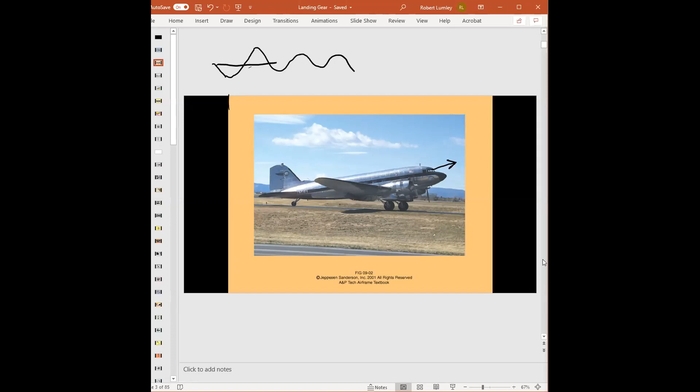The other problem with a tailwheel aircraft is mainly during landing, but it can be other times, and that is a tailwheel aircraft has the main wheels and then the tail wheel.

The center of gravity is somewhere in between, but it's aft of the main wheel, forward of the tail wheel. Now if we're going this way, the problem is that when you come into land, the brakes are on the main wheel.

The CG is where all the weight of the aircraft is trying to go forward. So here's the main wheel, here's the CG. When it's trying to go forward, if the aircraft gets a little bit out of whack, the CG is going to try to fishtail you or spin you out. This is known as a ground loop.

And that's because the wheels in front of the CG have more friction than the CG, so the CG tries to overcome that friction.

You may have done this before in a car. You know you have the e-brake, or emergency brake, parking brake. A lot of people's cars have a handle for that brake. Well, if you're making a turn and you pull up on the emergency brake, understand that only puts brakes on the rear wheels. The rear wheels, if they start to slide, lose traction, and the front wheels still have traction. If you're in a turn, you can lose control big time, meaning spin out.

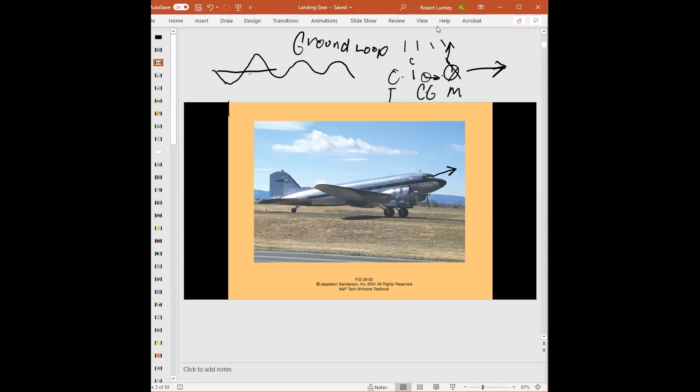Once the engines got stronger, we could use smaller propellers. Then we went to tricycle style landing gear, also known as a nose wheel aircraft. So now we have the mains back here, we have a nose wheel up here, and the CG is now forward of the main wheels, but aft of the nose wheel.

In this type of configuration, the pilot can see better going forward, so they don't have to taxi in that serpentine motion. And because the CG is in front of the main wheels, during landing, if we lock up or drag the brakes, meaning apply the brakes here, the CG still wants to go forward, so it keeps the aircraft going forward. Okay, good on that.

Come on, Kayla, where are you? Sorry, I was muted. Yes, we're good. Okay, at least do that and then I'll be happy. Get through a little quicker. All right, are we good with that?

Most aircraft are built with a nose wheel aircraft or tricycle gear, and it's also easier to make that aircraft nose wheel steerable than it is for the tail wheel. So that was landing gear arrangement: tail wheel type, tricycle type landing gear.

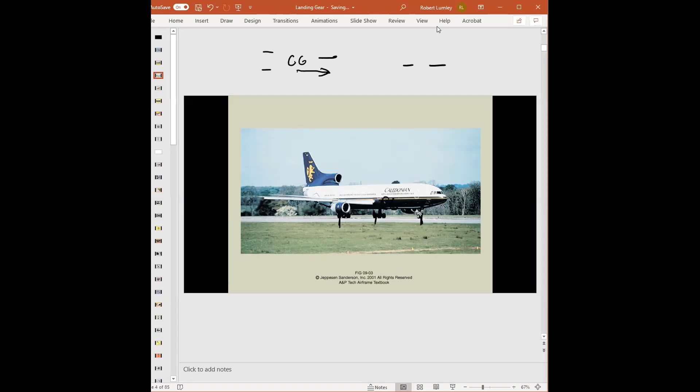They talk about tandem landing gear. Tandem landing gear just means that one wheel is in front of the other, kind of in a straight line. You could see that, for example, on the main gear, there's a wheel, one in front of the other, that you can consider tandem gear. Not a lot of aircraft have true tandem gear. If you know the Harrier aircraft, it has a nose wheel, it has a body gear, but out on the wings it has small little gear that hang down just so it doesn't tip over. Nothing tandem gear, just keep in mind one foot in front of the other, if you will.

So next they talk about fixed or retractable landing gear. That's the big question, and the answer is speed. Now this kind of goes back to the first picture and really is described well under landing gear types.

Here's the thing: a fixed gear aircraft generally will weigh less than a retractable geared aircraft, because a retractable geared aircraft has to have something that can retract the gear. This could be a hydraulic system, an electric motor, hydraulics and stuff, and all this adds weight to the aircraft. Whereas a fixed gear is relatively simple and thus weighs less. Well, here's the thing, and we kind of talked about it during the last class in assembly and rigging.

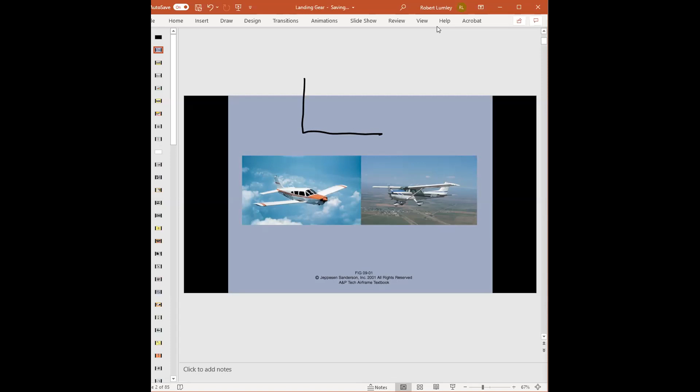We have two types of drag: parasitic drag and induced drag. Parasitic drag is anything sticking out of the aircraft that hits air, so the faster you go, the more parasitic drag we have. Induced drag, on the other hand, is created by lift, so the heavier the aircraft is, the more induced drag we have.

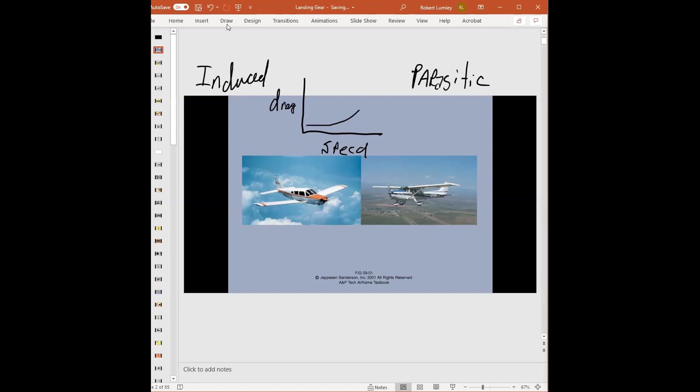The parasitic drag curve looks like this. Here's speed of the aircraft, and here's the drag. As we increase speed, parasitic drag goes way up. So this is parasitic drag.

Induced drag actually curves the opposite way. At very low speeds, we have to increase our angle of attack to produce the lift, and as we increase angle of attack to produce more lift, we produce more induced drag.

So, a slow moving aircraft versus a fast moving aircraft. If the aircraft goes slow, parasitic drag by having the landing gear out, meaning fixed, would be very low. And because the weight of the aircraft is lower, our induced drag would also be lower. Does that make sense?

Now, if we had the same aircraft that moved slow, but made it a retractable geared aircraft, the parasitic drag would decrease somewhat, but it's already low. The induced drag would actually increase because the aircraft is heavier, thus having to increase the amount of lift the airplane is producing with angle of attack.

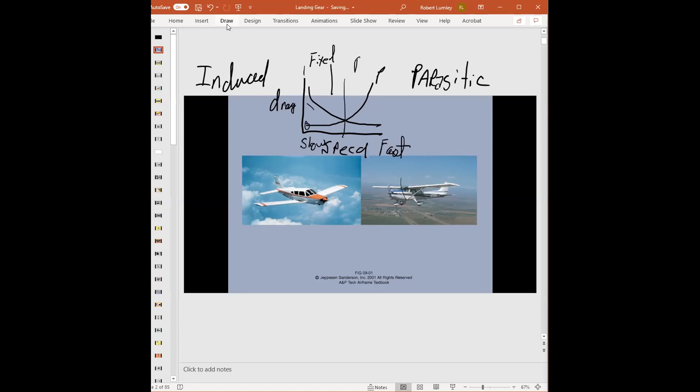So kind of in this part forward, we like to use a retractable aircraft. And that's basically it. If engineers are designing an aircraft meant to fly at low speeds, they generally will choose a fixed geared aircraft. If the aircraft is designed to go fast, they generally will, and there's always exceptions to rules, choose a retractable geared aircraft.

I think it's kind of interesting that there's a Cessna 172, and Cessna actually makes both versions, a fixed geared 172 and a 172 RG, which stands for retractable gear. They fly right about 140 miles per hour. The fixed geared aircraft doesn't quite make it to 140, it flies a little slower, but the retractable gear can go a little faster. Really, because they're in that quandary area of which is best, they decided to make two versions and let the customer decide what they'd like.

Are we good with this? Do wheel pants increase the aerodynamics? Yes, they're there to reduce the parasitic drag.

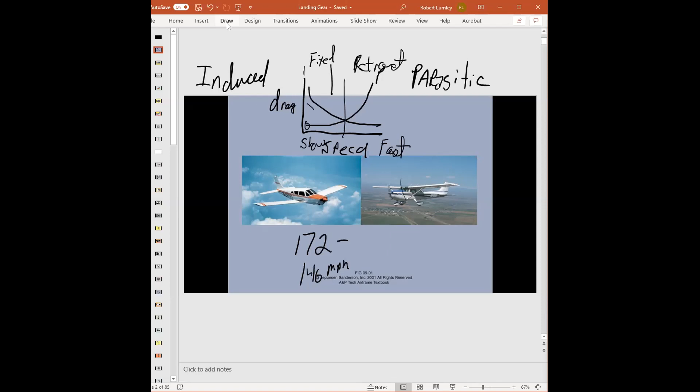They go into shock absorbing and non-absorbing landing gear. For example, right here, this is a picture of what they call streamlined wheel fairings and stuff like that. But this aircraft has what is known as rigid landing gear. The name rigid implies what it is - there is no shock absorbing device. It's just struts connected to an axle with a tire on it. These aircraft with rigid gear are very similar to the Mooney.

Ethan, is Ethan there? I don't see him right now. Oh, there he is. Yep, he's there.

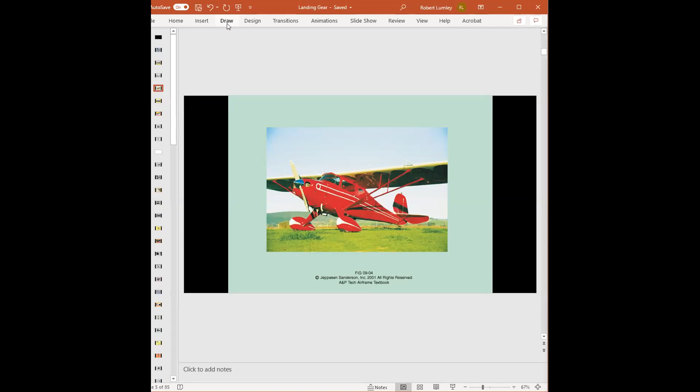All right, now a lot of fixed gear aircraft have what's known as a spring steel gear. The spring steel gear can be flat, like flat leaf springs of a car, or they can be a tubular spring steel landing gear. Tomorrow I'll be able to show you that on our aircraft, because the 150s some have flat steel, and then the 152 has the tubing, steel tubing.

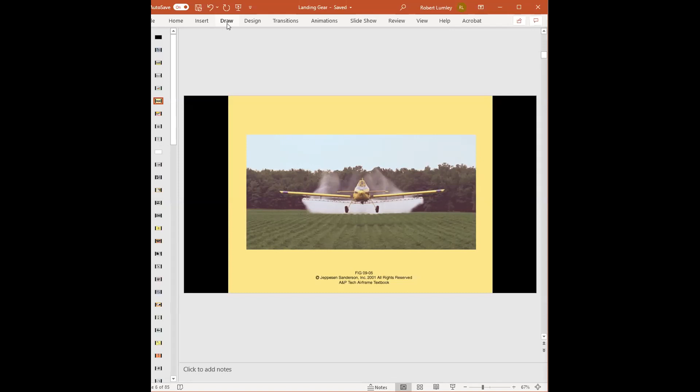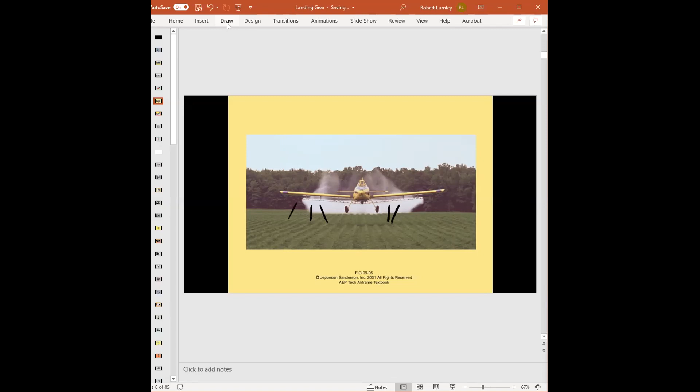Now, something I want to point out - we're looking at the landing gear. Can you see how the main wheels angle outward? This is known as a positive camber. When the wheels tilt outward, that's positive camber. If they were to tilt inward, that's known as negative camber. Now why are these wheels tilted out? It's because of the spring steel - the spring is not being compressed at this time. When the weight of the aircraft gets onto the wheels, the springs will bend outward, and the wheels will then go more vertical. If you land really hard, they could even point in for a second and then get back to their normal weighted position. And that is spring steel.

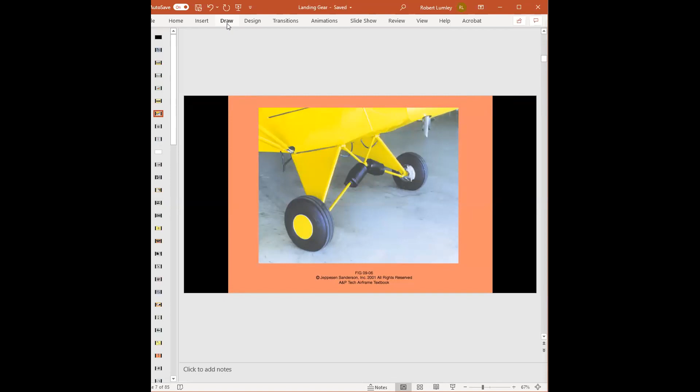Now this one's pretty interesting. What's that? What cub? I didn't hear you - Piper Cub? Yes, it does look like a Piper Cub, but without seeing the whole thing, can't guarantee. Okay, all right.

So remember how I talked about the rigid gear? Figure there's two attachment points here. Now, if this was a rigid gear, it would be secure and could not move. But what they did to give it some shock absorbing ability - these are hinges where a bolt goes through, so this can be pushed outward, it can hinge, go in and out on that hinge. Then there's a cross member that goes to the other side, then there's these black boots. Any idea what's inside the little black boots? Maybe weights? No? Ready for this? Rubber - rubber bands, yep.

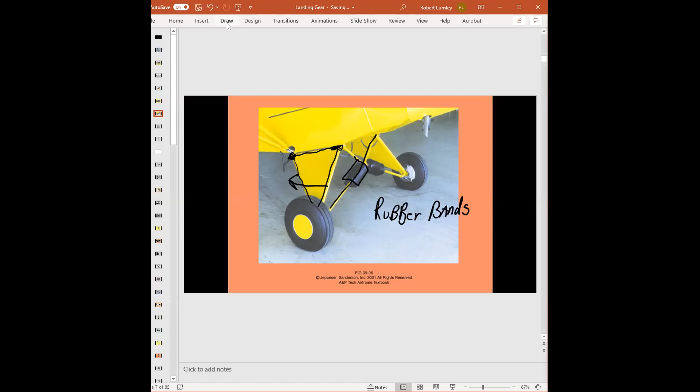Known as bungee cords. Okay, they're bungee cords. And there's actually a metal rod here, and then there's all these bungee cords wrapped around it. So when you're flying, the bungee cords pull the wheels kind of together. When you come into land, the wheels want to spread outward and thus stretch out the bungee cords. And the bungee cords are the shock absorbing device. Sorry to say, it's just that.

That's awesome. Yeah, all right.

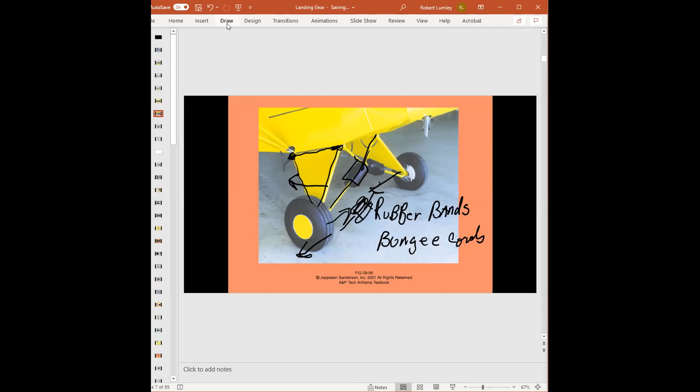Now, the most famous of all landing gear shock absorbing devices are what's known as shock struts. Shock struts are also known as oleo struts or air oil struts. They are very similar to the shock absorber of your car. But here's the crazy thing - ready? Your shock absorber of your car is much more complicated than our oleo strut. And why is that? Well, most cars stay on the road all the time, and as you drive, the surface of that road goes up and down and you hit potholes and do all of those fun things, right? And so the shock absorber, as the name implies, is designed to absorb any of the road irregularities, okay?

Whereas on an aircraft, we're basically always landing on improved runways and taxiways, so divots and potholes are always taken care of. We're landing and taking off on a smooth runway, and we're only doing this for very short periods of time, so it does not need to be very complicated.

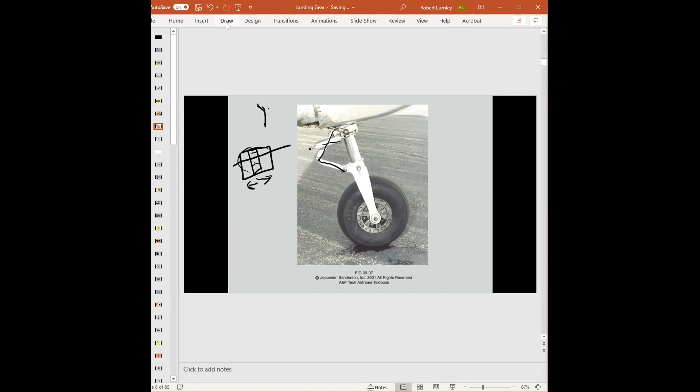The problem with many nose-geared aircraft is that, because of the geometry, we get what's called a shimmy. A shimmy is basically the nose wheel wanting to go left and right and vibrate back and forth, and it can be kind of violent. The shimmy dampener allows the pilot to turn the nose wheel left and right slowly, but anytime it tries to move very quickly, the hydraulic fluid with the piston prevents any rapid movement. So it minimizes the shimmying of the nose wheel, hence the name shimmy dampener.

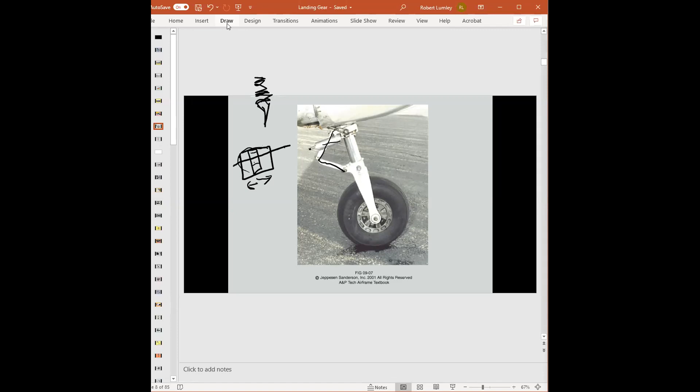Very simple device, and we will see it when we are in the shop doing projects. Now, to get a little deeper into the oleo strut. It's so much easier to show you the oleo strut in person, and tomorrow's main project is the disassembly, inspection, and reassembly of the oleo strut.

So this is just like a motorcycle. Oh yeah, yep, it's the front strut of a motorcycle. You got it.

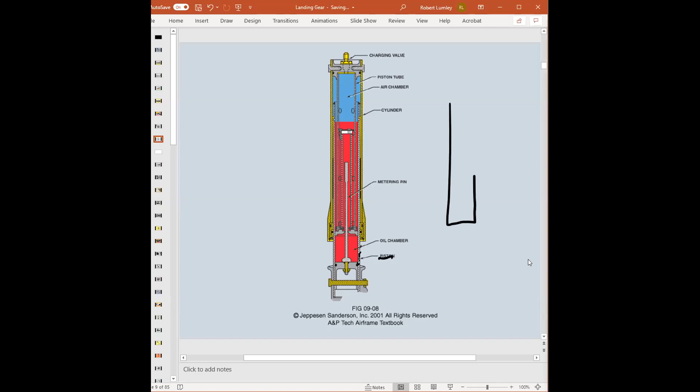So here's the chrome piece that I showed you, and that is known as the piston. I'm going to try to redraw this. Here we have the piston, and over the piston is the cylinder, it's like a sleeve, so the piston can get pushed up and down.

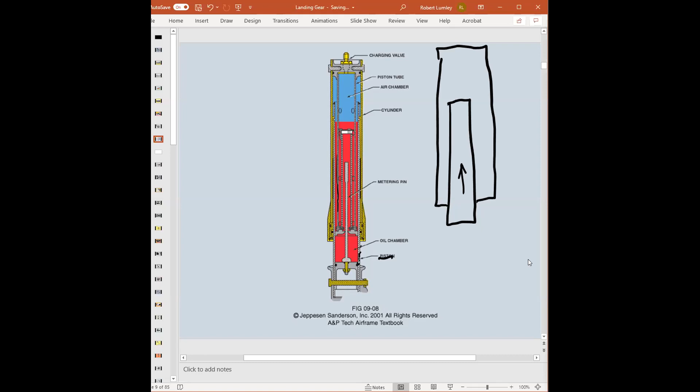Now on the inside, we can see that we have this what's called a piston tube, it's right here. I suck at drawing, it's so difficult sometimes. I'm going to try to do it here, and if it doesn't work, I'm not going to beat myself up, we're going to see it tomorrow.

Here's the thing: when this is fully extended, the red, which is the hydraulic fluid, is all down low, into this chamber. When we come into land, the piston is pushed up, but the fluid is kind of trapped here. But there's an orifice, an opening here. And that's what I did wrong, I drew that one wrong.

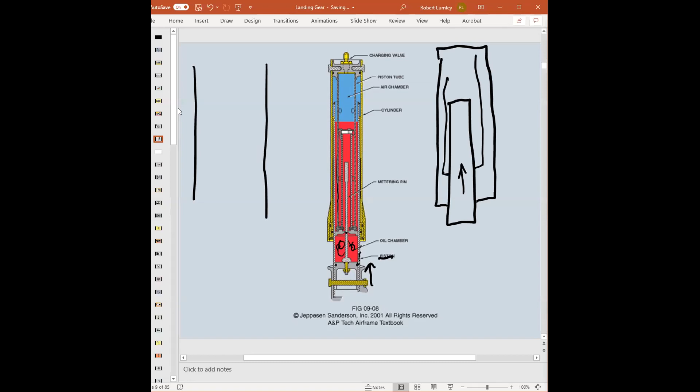Let me try this again, and let me make it bigger. So now we have this, what's called the orifice tube, and it kind of bulges out like this, but there's a hole here. The piston is here.

And then we have O-rings that seal it. This piece and this piece make a seal.

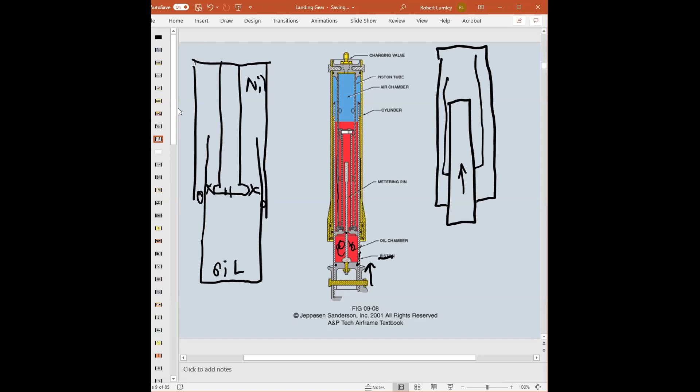Now, when it's fully extended, we have oil down here and gas up here. Generally, we use nitrogen. Now, when this gets pushed up, the oil has to go and compress the nitrogen.

So the oil actually has to flow through the small, what's known as the metering orifice, and out the holes of the metering tube. Now what's happening is the nitrogen is getting compressed, and we can compress a gas. That opening limits how quickly this can close, and then the nitrogen is giving the cushioning effect.

One of the things you need to remember is that when an aircraft is sitting on the ground, we will see a little bit of extension of the piston. What the aircraft is actually riding on is the gas charge. The nitrogen is supporting the aircraft.

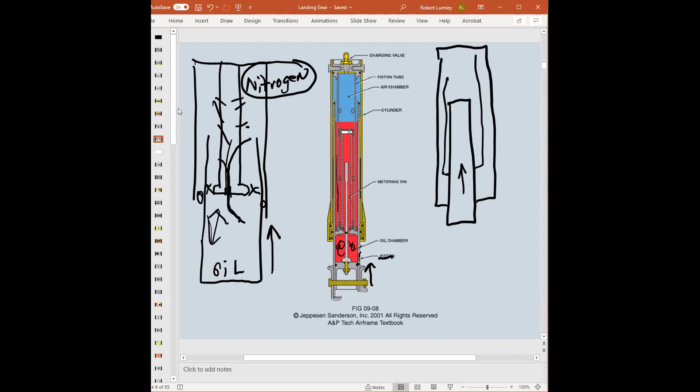Now, when we go to take off, the weight of the aircraft is no longer on the struts, and so the nitrogen can expand, pushing the oil back down, and the piston will extend. I know this really doesn't make sense unless I can show you the stuff. Tomorrow we're seeing it.

Now, this one, if the oleo strut is installed on a relatively light aircraft, for example the Cessna 150s, or the ones we're going to be taking apart, which is from a multi-engine aircraft, an Aztec/Apache, they're relatively light. So all they need is a metering orifice.

As an aircraft gets bigger and heavier, the problem is that when we come into land, if we only have a small orifice opening, the pressure can build up so great and not flow past the orifice fast enough, and too much pressure could be built up.

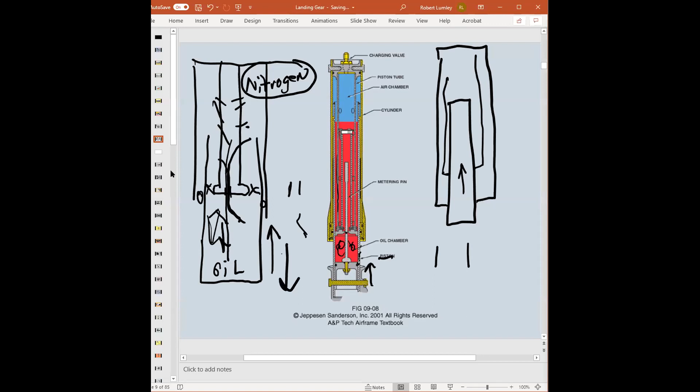So they have what's known as a metering pin. How the metering pin works is this: here's the metering orifice, and then the metering pin kind of tapers out like so.

The idea is this: when we're up in the air with no weight on the wheels, the metering orifice is fully open. Thus, when we come into land, there's a lot of fluid transfer that goes from the bottom to the top. But as the oleo strut gets compressed, the metering pin closes off, or starts to close off the metering orifice, restricting the amount of fluid that can transfer from bottom to top. So it slowly makes it harder to compress that strut.

Okay, well what happened was then they developed a problem, because the opposite happens when you take off. When you take off, the weight comes off. Initially, the oleo strut has a slow extension, but because the opening of the metering orifice is small, it can only extend out slowly.

But as it comes down, the metering orifice is opened up more and more, allowing more fluid to transfer at a faster rate. And so they would get what's known as a hammering blow, which could actually blow out the strut from this cylinder, meaning the piston from the cylinder.

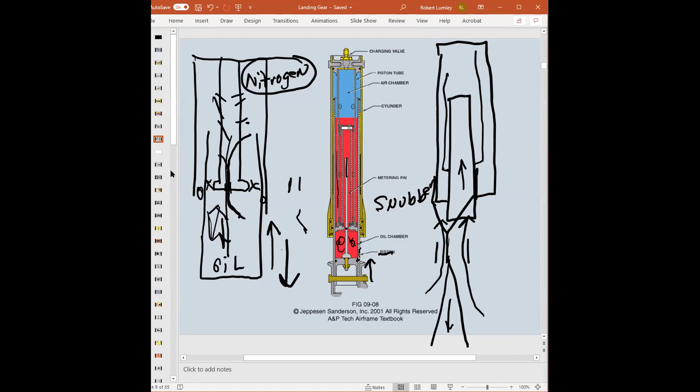Some larger oleo struts have where this is, where the metering orifice kind of looks like that. There's actually a pressure plate here with springs on it, and then there's additional holes. That way, if the aircraft has an extremely hard landing, the pressure here builds up so much, but only has one passageway through the metering orifice valve.

There's additional holes, so when the pressure builds up, these are basically pressure reliefs that allow additional fluid to go from the bottom to the top chamber. And then the springs close it down and stuff like that.

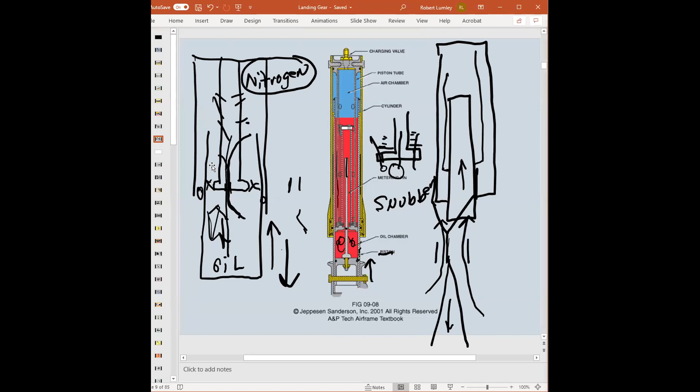I'm not really going to talk about servicing of shock struts because that's something we will be talking about in class, and it's just much more efficient talking about it as we do our projects and such. Are we good with that?

I don't know. I'm going to see if I can find something real quick. I'm trying to find something.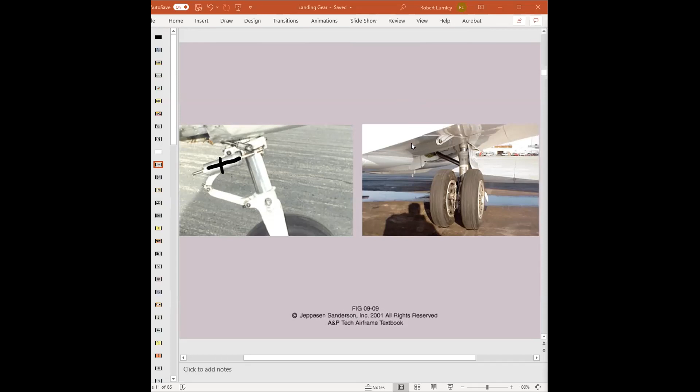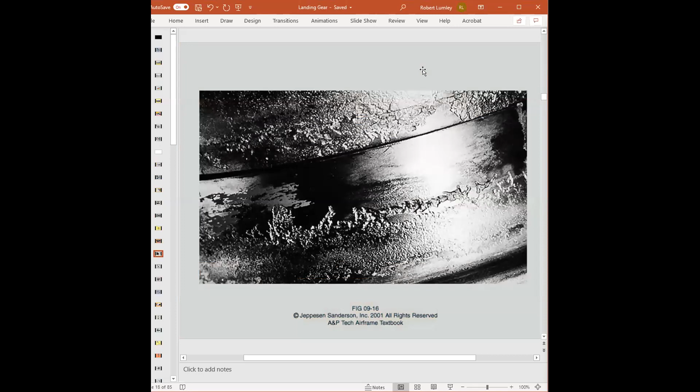What I mean by that is they're actually multiple pieces. They don't really show that picture right away, but our wheels come in 2 pieces minimally, some actually 3 pieces. So our aircraft wheels are bolted together. We have a hub like so, and then the other piece goes like so, and the tire fits like that, and they're bolted together. Of course they're not that close together.

Some are 3-piece, where you have the outside rim, the center, and then an inboard rim. Now I'm just going to talk about the 2-piece rims because those are the most prevalent out there. So we have a 2-piece rim.

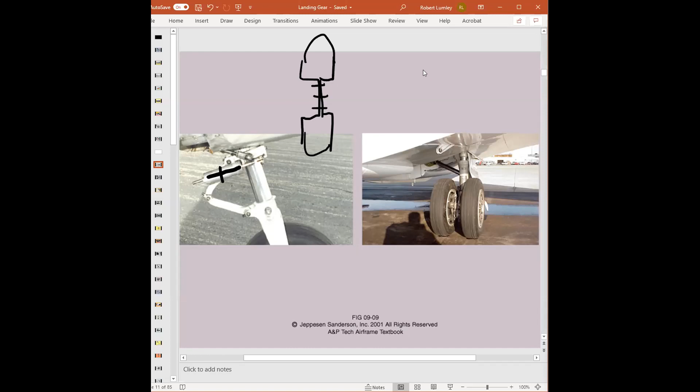What they came up with is, hey, we need to be able to identify which rim is which. So they came up with the terms inboard and outboard. Now I think it's kind of funny because inboard, outboard doesn't necessarily mean which way they're facing on the aircraft.

So how can you identify the inboard and outboard portion of the rim? If we look at this one, this is inboard, so you'd say that's the inboard wheel half. But guess what, this half is this half, this half is that half. So the inboard wheel half, as our book talks about, can be identified by a couple things.

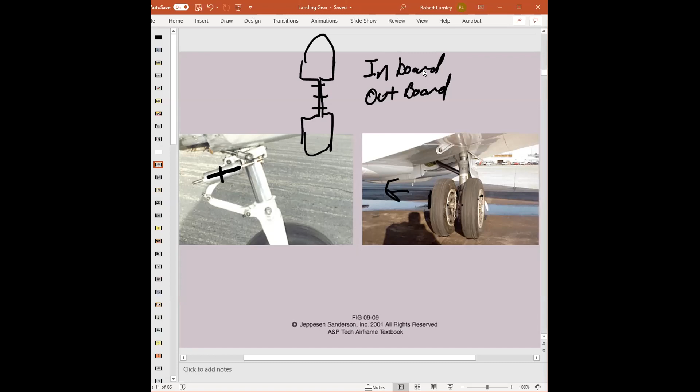One is that we have brakes. So if the wheel has brakes, they will have an attachment for the brakes. This is many times known as the disc drive slots. Also, some aircraft have what's called... fuses, hey, fusible plugs.

So if you're inspecting a wheel half and you see there's an area for the brakes to go, or if it has fusible plugs, we know that's identified as the inboard wheel half. The outboard wheel half is identified by the valve stem, and that's probably the easiest way to identify it. The valve stem is where we add the air or nitrogen gas to charge the tire. So outboard wheel halves have the valve stem. If it doesn't have a valve stem, we're dealing with the inboard wheel half.

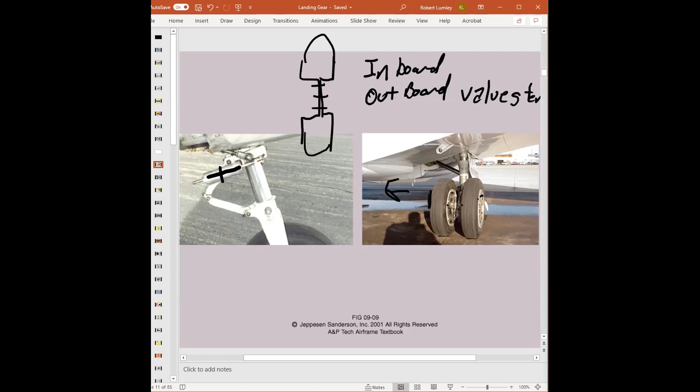But you should know, the inboard wheel half many times will have brakes, or they will also have what's called a fusible plug. I'm just going to speak about the fusible plug right now since I brought it up. You may be going, hey, what's a fusible plug? Well, here's the problem. Here we have a tire, right, and there's our rim.

Now here's the problem. Let's say we're coming into land and the brakes catch fire. That can actually happen because the brakes create a huge amount of heat when we stop.

Well, that heat can heat up the gas inside the tire enough that the tire could blow up from overpressurization. The idea behind a fusible plug is that it has a low melting point metal, like solder, an alloy that melts if the tire gets hot enough, letting air escape without rapidly decompressing.

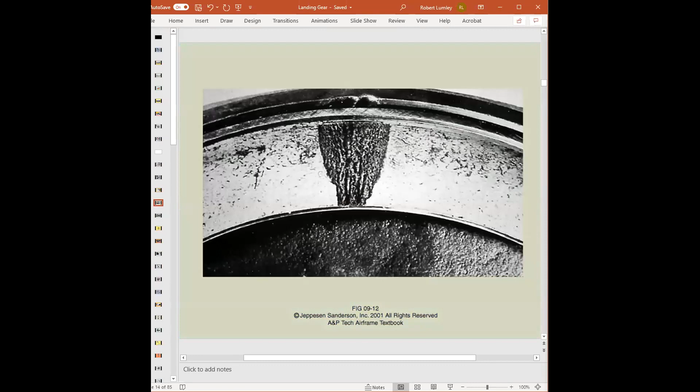Now, once again, no real good pictures, okay? Not even that is a very good area, but it's the best that I have. So what we want to then do is remove the bearings and inspect the bearings. I'll do that first because that's kind of what they're showing here.

Pretty much anything that you notice on a bearing, unless it looks absolutely brand new, causes the bearing to be rejected. What they're showing here is that the bearings are basically two pieces. We have the roller bearing, such as these, which is a cone, and then we have what's called a race that the bearing rides along.

Many times you will see these black lines on the races or on the bearings themselves. Any discolorization, or what looks like little black lines, many times people refer to them as water spots. What that actually is, is what's known as intergranular corrosion, and there is no repair for it except replacement.

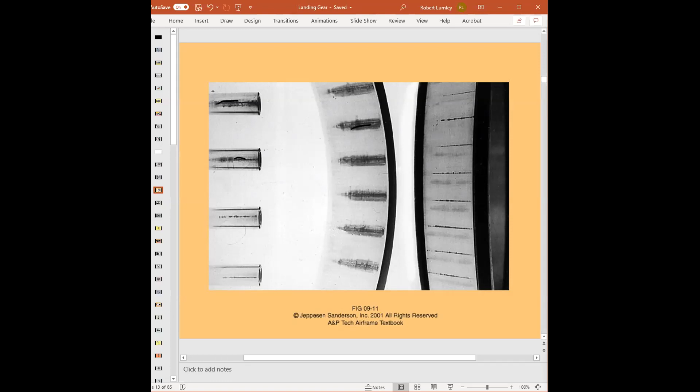If you see a bearing that is discolored, such as this bearing right here — this is what I was talking about being a cone bearing, because it's cone shaped — you can see the discolorization and a line here. Or if you see different colors like blue and stuff, that indicates the bearing has been overheated and thus has to be replaced.

Now, when replacing a bearing, we can't just replace the bearing. We have to also replace the race. They are a matched set. Whenever removing the bearings, we always want to identify which is which, meaning the inboard or outboard wheel half, because if you mix them up, the bearings will fail in a very short period of time. So they're a matched set, and when one or the other has to be replaced, you have to replace both, meaning the race and the bearing associated with it.

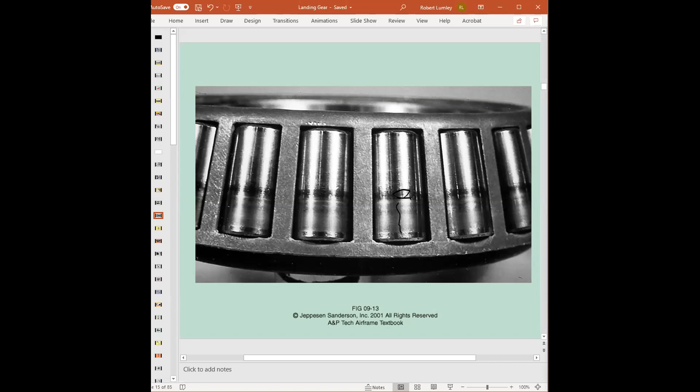Now also here, this is what's called spalling. A portion of the race has kind of flaked off, and that's spalling — totally bad, reject. Most of the time, if the bearings have been used for any length of time, you will find that they have to be replaced.

I will discuss how to remove the race when we're doing this project as far as disassembly, reassembly of the tire and inspection.

For the rim itself, once the bearings and races are removed and we're going to put new ones in, we want to thoroughly clean the wheel itself, or the rim, and then we need to do an inspection. Now, depending upon the aircraft and the weight of the aircraft, that determines what type of inspection must be done. But let's talk about the larger, more complex case.

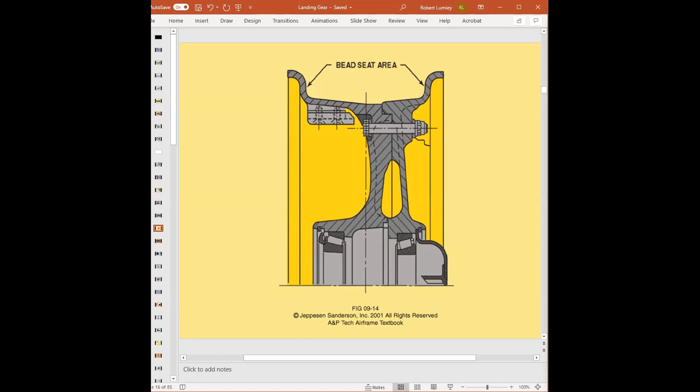For the rim, we have to do what's known as non-destructive testing. Now, the most critical part of the rim is what's called the bead seat area, this kind of curled part, because the tire bead is pushing out against that area. So this is trying to get pushed this way and stretch this out.

Because of that, this area has been pre-stressed to try to move inward. It is so much pre-stressed inward that if there's a crack in the bead seat area, the pre-stress will close that crack where you would not be able to detect it with normal non-destructive testing, such as a dye penetrant. So you're not allowed to dye penetrate the bead seat area for a proper inspection.

So what type of non-destructive testing do we do in this area? It's known as eddy current. We do the eddy current inspection on the bead seat area because that would detect even the slightest crack or flaw within the bead seat area.

The other area we normally use eddy current is in the bolt holes. Here we see the tie bolt. Keep in mind the tie bolt is made out of steel, while the rim is made out of an aluminum alloy, maybe even magnesium alloy. Dissimilar metals happen to create corrosion, so there's a good possibility we could have corrosion in this area, and so eddy current inspection is generally done to the bolt holes.

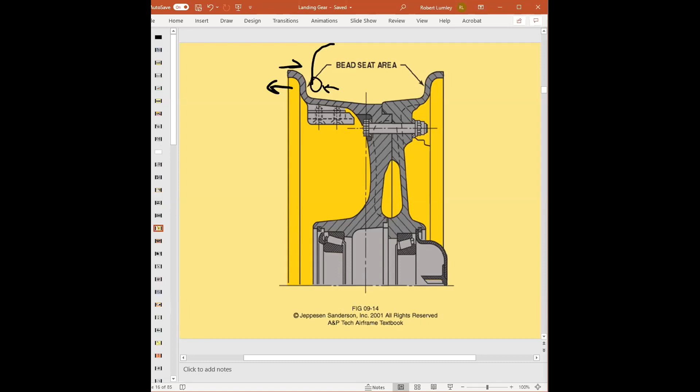So we have the rim apart. We remove the bearings, we've inspected the bearings, and we've done the non-destructive testing of the rim. Now it's time to put it back together. We grease the bearings and put in the races.

We then put the tire onto the rim. If it's a tube type tire, the tube is installed into the tire and then the rim is placed inside the tire. A couple other little things I'll discuss in class, like how we set up where the valve stem goes. But then we really just put it back together, and later on we'll talk about airing the tires and installing it on the aircraft, doing a proper inflation of the tire. Keep in mind, that's for another lecture.

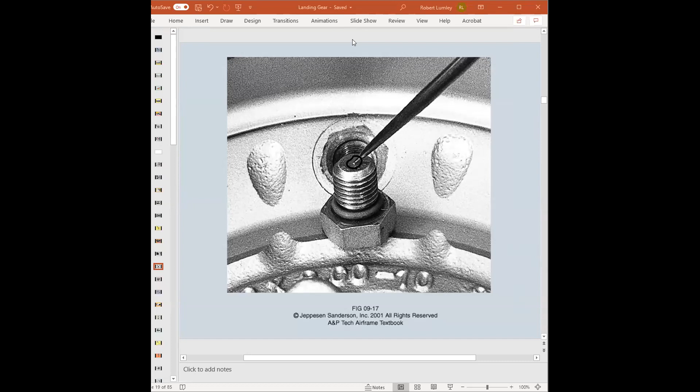All right, okay, so that's small aircraft, that's large aircraft. Hey, we now talk about the shimmy dampener. Didn't we talk about the shimmy dampener already? One of them, yep. Well, pretty much any shimmy dampener does the same thing.

On these, they're non-serviceable, meaning that when they go bad, the only thing you can do is buy and replace the shimmy dampener. And sorry to say, they're not really cheap. But we've talked about the shimmy dampener, and when we're out there, if it's a serviceable one, I will demonstrate, or we'll talk about how to service it and such.

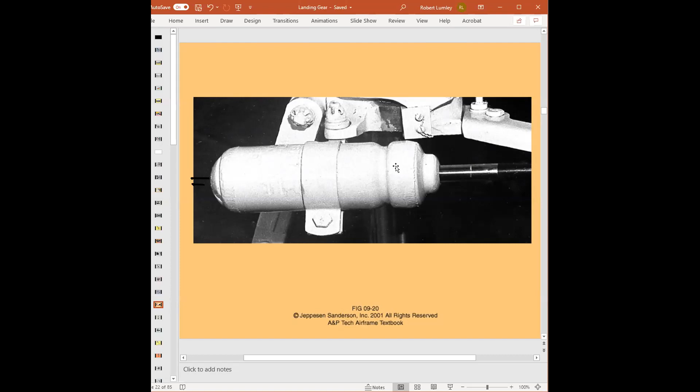Okay, so here, what do we have? We have the steering cylinders, and generally there's going to be two on the nose gear. So when you're moving the tiller or any other nose wheel selector valve, could be by the rudder pedals but most of the time it's by a tiller, what does it do? It directs the hydraulic fluid to the proper actuator side to then move the nose to the right or to the left. Because we now have actuators on the nose gear, the nose gear actuators or steering cylinders also act as the shimmy dampeners, so they combine the name and call them steering dampers.

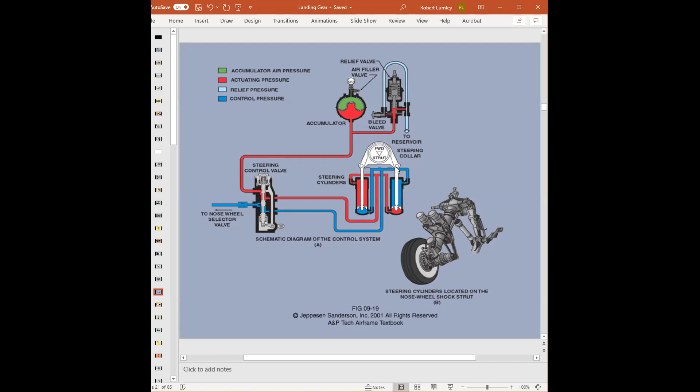Woo, that was fun and exciting. All right. Where are we at now?

There we go, landing gear alignment, support and retraction, the wheel alignment. I hate how the book kind of goes, but all right, I'll use this one. Okay, wheel alignment, two things we have: wheel alignment, one I've already kind of mentioned, and that's called the camber. The camber is, here's the center line.

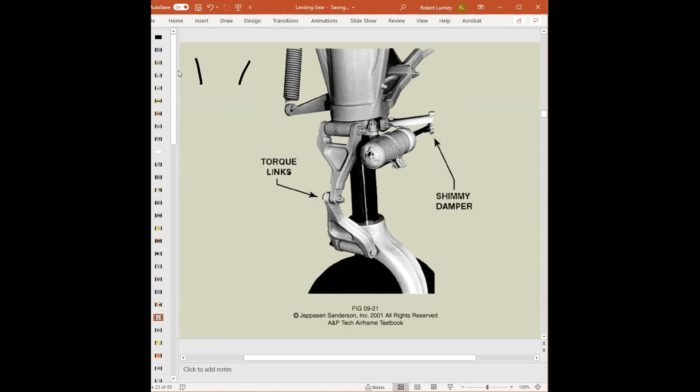I'm going to do toe in, toe out first. Let me see which one they talk about first. I'm going to do this one. All right.

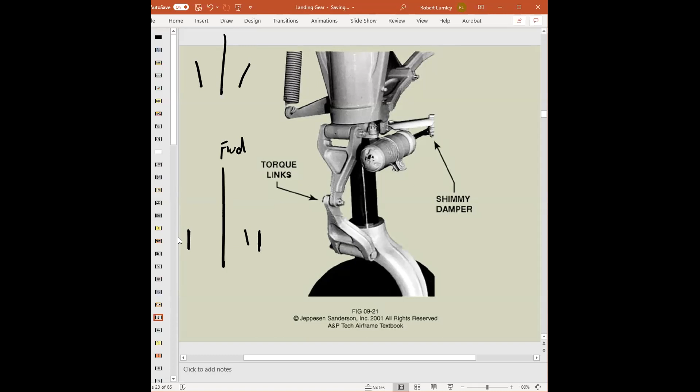Here's the center line of the aircraft, and here's forward. Now, generally we're talking about the main wheels, and for all practical purposes they should run parallel to the longitudinal axis of the aircraft. If a wheel kind of points in, we call that toe in. If the wheel has a tendency to point outward, that's called toe out.

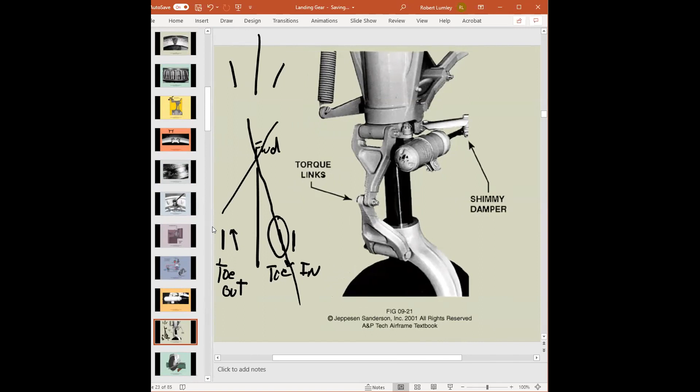Now, the FAA questions go like this: if you were to take a straight line and the tires would intersect forward of the aircraft, is that toe in or toe out? The answer is that's toed in. If the straight line of the tire crosses the longitudinal axis behind the aircraft, that's known as toed out. I usually use the term 'point' - if the wheel points in, that's toed in; if it points out, that's toed out. Understand? Okay.

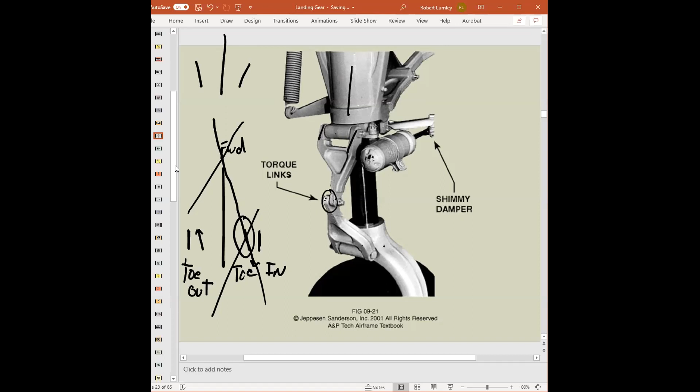So how do we adjust toe in and toe out? Well, here we have what's called the torque links. The top torque link is connected to the cylinder of the oleo strut, and the bottom part is connected to the piston. Remember, if this is disconnected, the piston could rotate 360 degrees - this is what keeps the wheel properly aligned. So how we adjust toe in and toe out is by adding washers in between the two connections of the torque links. We add or remove washers to adjust toe in, toe out.

Now, the hard thing is, for example, if here is the center line of the aircraft and this is the left main, if we add washers here, that would actually toe it in, whereas if we removed washers it would toe it out. It would be the opposite if the center line is here and this is the right main - if I add washers here, that torque link would move this way, and the tire would actually point outward, so it would toe it out, whereas if I removed washers it would pull it in and be toed in.

So there is no 'hey, I add washers, it always does this' - it depends upon the arrangement of the torque links and whether that landing gear is the right main or the left main. But how do we adjust the toe in, toe out? We do it by adding or removing washers between the torque links.

Now, how do we tell if it's toed in or toed out? Well, what we do is put a big straight edge against the main wheels, then we can use a carpenter square. Once again, here is forward. So when we do that, right here and right there should make contact if they are straight, neutral. If, for example, it hits the front of the rim but not the back, then it's toed out. If it hits the back and not the front, it's toed in. Make sense?

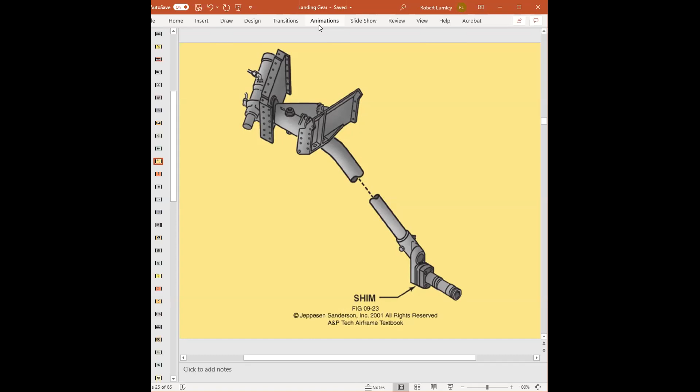This again is where we have the torque links and where it says place washers here for adjusting toe in and toe out.

What we also do, and on a lot of aircraft, especially the more rigid landing gear, meaning spring steel, the weight of the aircraft can put enough friction on the tire that we get an improper test or inspection, because the friction between the tire and the ground is keeping that tire from going to its natural position.

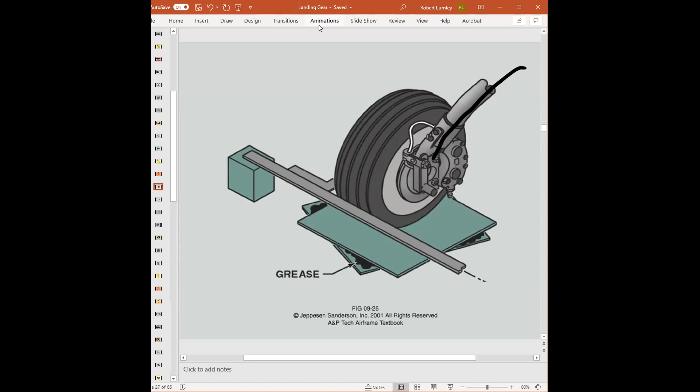So what we can do is use what's called grease plates. Taking two pieces of metal plate, putting grease between, we move the aircraft onto the two plates, and then we move the aircraft back and forth. This will remove the friction between the tire and the ground and let it go into its testable position. This is showing the checking of the toe in and toe out.

The same goes with the camber. A positive camber is when the top of the wheel leans outward. A negative camber is when the tire is leaning in towards the inboard, that's the top of the tire.

Most rigid or spring steel or fixed gear aircraft, the only adjustment would have been initially with the shims. Other than that, there is really no adjustment at all.

With an oleo strut retractable gear aircraft, we have what's called a drag link, a part of the gear that pulls the gear up and down. Generally the drag link is what you would adjust to get to the neutral camber, because most of the time we're not looking for positive or negative camber. We are set up to take off and land straight, so we want everything to be neutral toe, neutral camber, straightforward, in line with the longitudinal axis.

Whereas with cars, depending upon what you're doing to increase or decrease the handling capabilities, there's a lot more things that can be done.

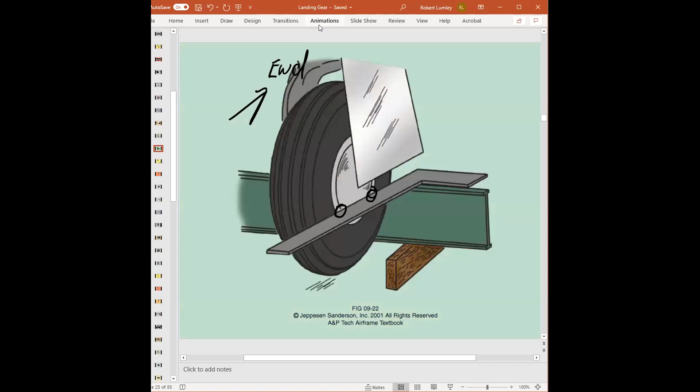Going back to spring steel, now this is without the weight of the aircraft, but we can see how it has a positive camber. Theoretically, at a specific weight of the aircraft, you would have neutral, but these aircraft were not really too concerned with how much camber it has.

Because they're spring steel, they will definitely have a positive camber. If they don't have a positive camber, we have a problem with the spring steel gear itself, not the tires or the rims and axles.

What's kind of crazy is a lot of flight trainers have this. Can you see that when the pilot comes into land, we're actually hitting the outboard portion of the tires first? And that part of the tire wears very, very quickly.

So much so that you don't get very much life out of that tire if you do not rotate the tires. When I say rotate the tires, we don't mean taking the left tire and putting it on the right, because the same wear pattern would happen on the outboard again. What we would do is, once the tire shows a little wear, disassemble the tire and flip it onto the rim so that the unused inboard portion is now the outboard.

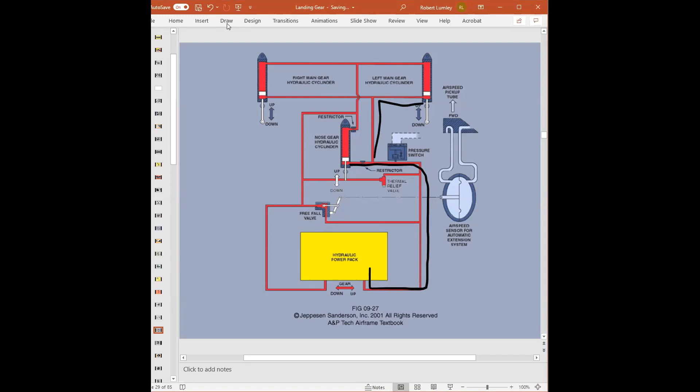Now, so once again, if the pilot was to select down, then what happens? The pump pushes the hydraulic fluid out this way and goes to the top of the cylinders, and thus the landing gear is extended.

Now, in this case, once the gear selector is up, the hydraulic fluid pumps to the cylinders and starts retracting the gear. Now, what holds the gear in the up position is hydraulic pressure. Understand that when the pistons are moving, the pressure is not really increasing at all, because the piston is moving. But once the gear goes to its full travel, we have this device here called a pressure switch. The hydraulic pressure in that line is going to go up and activate the pressure switch. The pressure switch then will turn off the power pack, meaning the electrical power going to the power pack. That's shut off and the gear is held up by the hydraulic pressure.

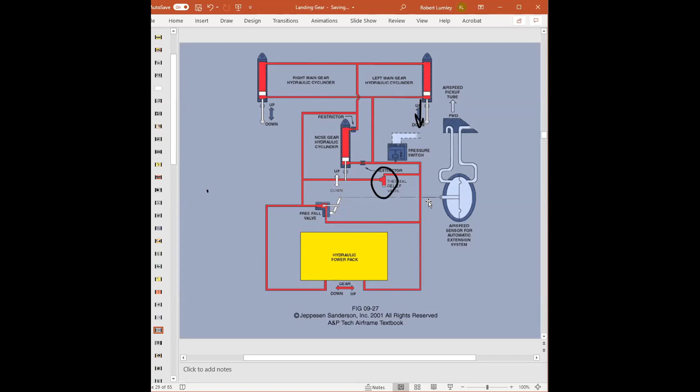Now, we also have this device right here, and it says it's a thermal relief valve. And that's kind of a misnomer because, well, let me just try to explain. What the thermal relief valve does, and what it really is, is a pressure relief valve.

The problem is that we have the hydraulic fluid trapped, and as we said, we cannot compress a liquid. But let's say it's a cool day at one point, the hydraulic pressure's 1,000 PSI, but it's trapped. Now, if the temperature of the hydraulic fluid rises, what happens? It wants to expand, because hydraulic fluid will expand and contract with temperature, but you can't compress it. So if it rises slightly in temperature, the pressure will go up significantly.

So much so that if we have a good enough rise in temperature, it could actually exceed the bursting pressure of the lines, the fittings and such. So the thermal relief valve relieves the extra pressure caused by the thermal expansion of the fluid. That's why they call it a thermal relief valve.

So if the pressure goes up too much, let's say the maximum is 1,000. If it hits 1,100, 1,200, what happens? The thermal relief valve opens a little bit, because basically all it is is a ball and a spring, and it will release some fluid back to the reservoir. So the high pressure goes through the valve and gets returned back to the hydraulic power pack reservoir. And that's the thermal relief valve.

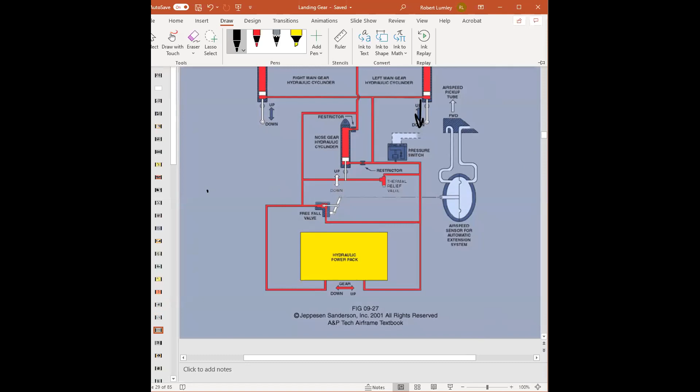This is a, what? Sorry, I don't know why it's not centered. Okay. All right.

Restrictors are used to control the rate at which the landing gear comes up and down. In this case, let's say we want all the gear to come up and down at the same rate. And understand that each aircraft is designed specifically for that make and model of aircraft to have the gear come up a certain way. Some aircraft, the mains and the nose come up and down at the same time.

But in some cases, the nose wheel might come up faster and extend faster than the mains. In some, the mains go before the nose gear. And this all deals with the aerodynamics of the aircraft, the weight and balance of the aircraft, and ultimately the control of the aircraft. So whatever they find is necessary on how the gear comes up and down, this is where the restrictors can be used to get what we want.

Because the restrictors reduce the flow of fluid. Here's an example: out of 100% of the fluid flow, notice we have a junction. We could say 50% goes to the nose gear and 50% goes to the mains. But at this junction, the left main only gets 25% and the right main only gets 25%. So could you see that's 50, not 25? Could you see then the nose gear without restrictors would go up twice as quick as the mains?

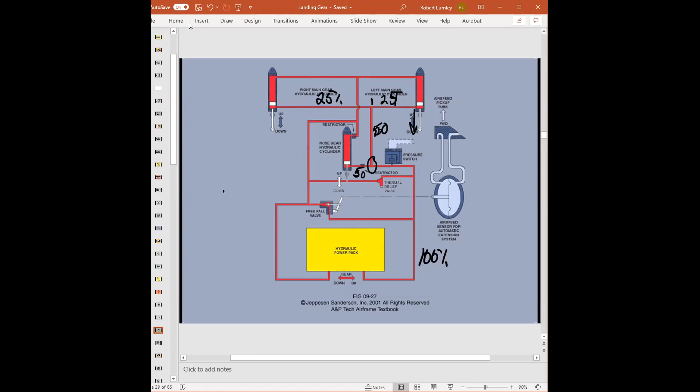Next, we have what's called a free fall valve. Here's the scenario: the aircraft was designed with no free fall valve, or any type of emergency extension system. Keep in mind that any aircraft with a retractable gear system has to have an alternate way than the standard way to extend the gear. Not necessarily to retract the gear, but just to extend it.

So if this did not have a free fall valve, what would happen? Let's see. The gear is retracted, but during flight, for whatever reason, we had an electrical failure or a hydraulic power pack failure. Well, then when the person wanted to place the gear in the down position, the hydraulic pump's not going to work, the valving isn't working, and thus the gear could not be extended.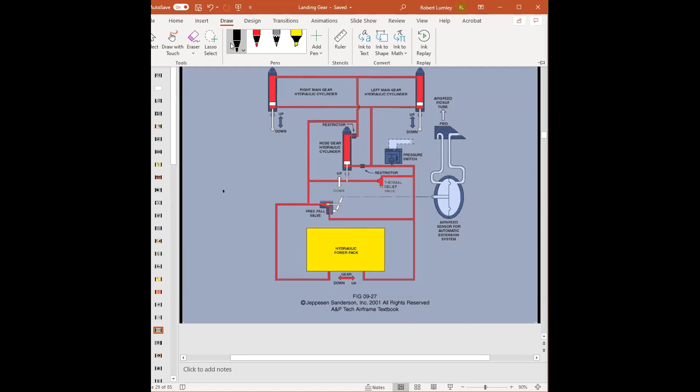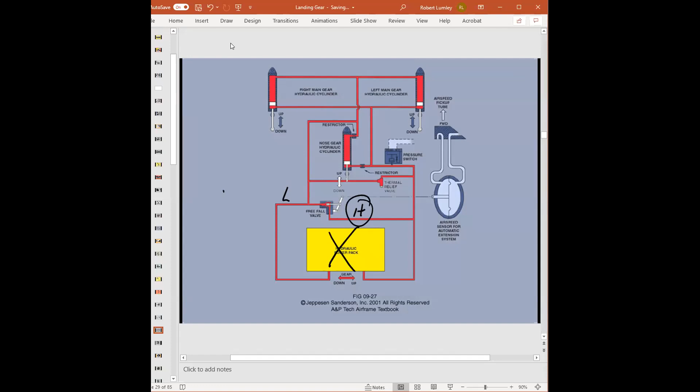So to solve this problem, they installed what is known as a free fall valve. Keep in mind, when the landing gear is up, it's only being held up by hydraulic pressure. So we have high pressure here, but low pressure on the opposite side of the free fall valve. And the fluid wants to go back to the reservoir of the hydraulic power pack. So in an emergency, say a failure of the power pack or an electrical failure, the pilot could pull out the free fall valve, releasing the high pressure hydraulic fluid that's holding the gear up, and return it back to the power pack.

We use gravity, the weight of the wheels in the landing gear, to then drop down to the fully extended position. That's the emergency extension system for that.

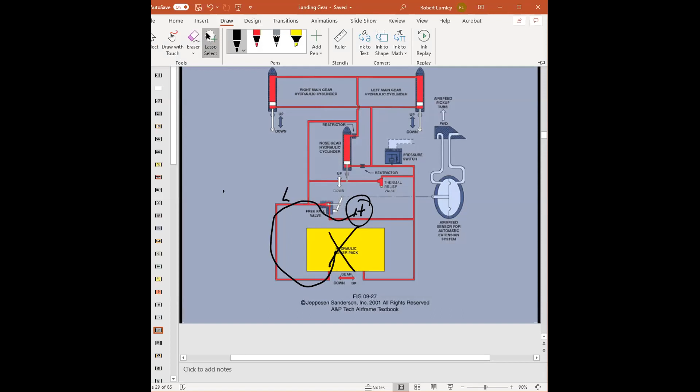Now, there's more. Well...

Piper, and it was very famous early on, Piper decided—well, sorry to say, but a little story. Remember, this is kind of on small general aviation aircraft, and there's a problem: we have people called pilots that fly these airplanes. When they first learned to fly, most likely they've flown a fixed gear aircraft. Then they bought an aircraft with retractable gear. One of the things pilots would forget is to follow the checklist. And so they would come in and forget to lower the landing gear, and they would do what's known as a gear up landing. And go, oh my God, I just wrecked the aircraft. I forgot to put the landing gear down, blah, blah, blah.

So Piper came up with an airspeed sensor for an automatic extension system. What this did was, when the aircraft went below a certain speed, say 120 miles an hour, the gear would be extended through the free fall valve. So we have this airspeed sensor.

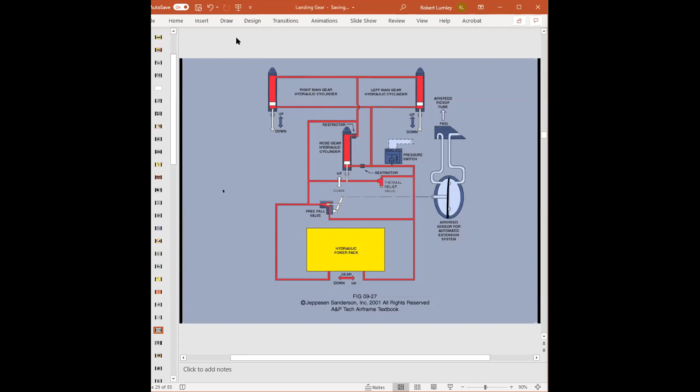Basically, we have a diaphragm, connected to the pitot tube and the airspeed sensor. So when you're going faster than 120 miles an hour, the impact pressure pushes the diaphragm to the left, which closes off the free fall valve. When we go slower than 120 miles an hour, the air pressure is not great enough, and the free fall valve is now opened. It's a very simple but effective system.

So how this was supposed to work is this: if the pilot was coming in to land but failed to put the gear in the down position, once they went below 120 miles an hour, the airspeed sensor would pull the free fall valve open, releasing all the pressure that kept the gear up, and the gear would do an emergency extension to the down and locked position. And the pilot could land.

Well, the problems started to exist. Pilots learned, hey, why do I have to move the gear handle anymore if I have an automatic extension system? So some pilots would leave the gear selector in the up position. They start the aircraft, they're on the ground, they're taxiing, not doing 120 miles an hour, so the pump is running but it's just circulating. Now when they take off at 120 miles an hour and leave the earth, the free fall valve is closed and the landing gear is retracted.

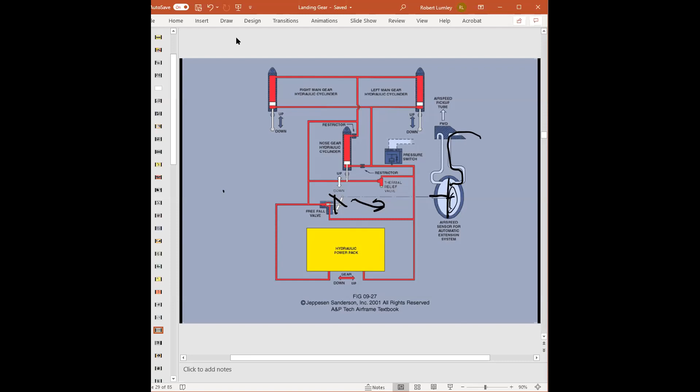Next, what they also found was that eventually the diaphragm will get a leak in it. So let's say it's supposed to extend the gear at 120. Well, if the diaphragm gets a leak in it, now it might take 140 miles an hour to keep the gear in the up position. Once you fly less than 140, the free fall valve opens.

Well, that can cause additional problems aerodynamically, because some landing gear you can only extend below a certain airspeed. And 140 miles an hour might be way too much for this landing gear to handle, and thus it extends and fails.

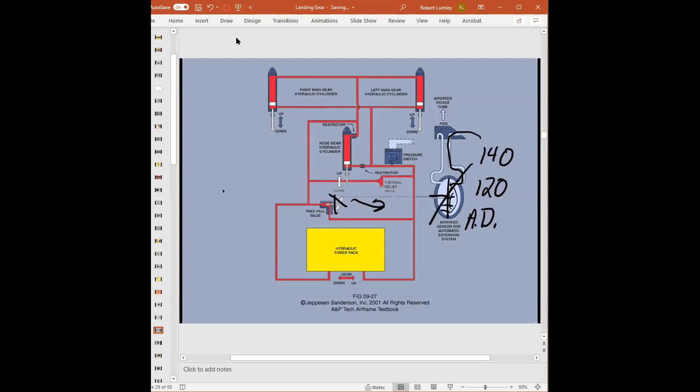So guess what the FAA came up with? An AD says you have to disconnect and remove the automatic extension system. There were so many problems - pilots relying on it too much, the diaphragm leaking, the gear extending when it shouldn't, and such. They're like, okay, any aircraft that has this airspeed sensor for automatic extension must be removed and disconnected.

Now, why wouldn't they link it to elevation instead of airspeed? Well, because elevation - understand that elevation would work for like North Perry Airport, because we're basically at sea level. But when you're flying, for example, if you're out in Denver and you land, if you look at your altimeter, it could say roughly 5,000 feet.

Yeah, because every airport at a different elevation makes different sense. Now, a lot of aircraft now have what's called a radar altimeter, which basically sends a signal like a depth finder of a boat and says, hey, you're above the ground this far. But we're talking cheap old technology here - I'm sorry to say it's still out there.

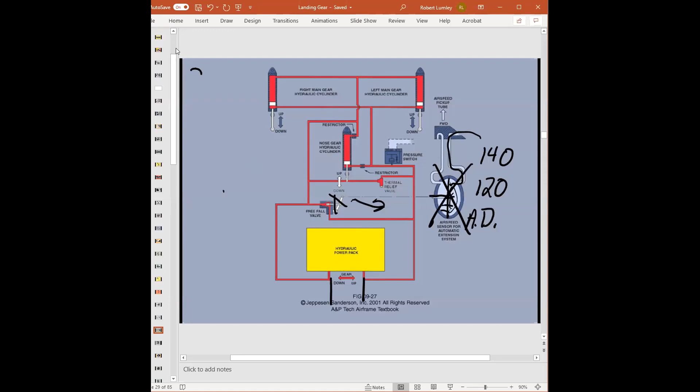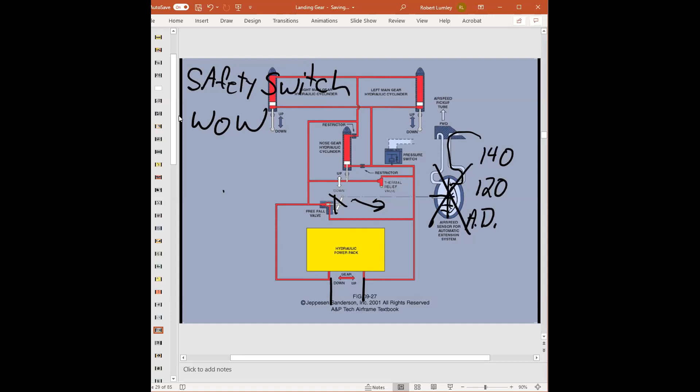Now, a safety switch is usually installed on one of the landing gears. Generally it will be the left landing gear, but it doesn't always have to be. If the aircraft's on the ground, this safety switch is activated to prevent the landing gear from being inadvertently retracted, because it senses the weight is on the wheels. Some people call it a WOW switch, meaning weight on wheels. The official name is safety switch, but many people call it a WOW switch. Some people even call it a squat switch.

Why squat? Well, when the aircraft's on the ground, the weight is on the oleo strut, and it looks like the aircraft is squatting somewhat. So squat switch, that's what I grew up with, it being known as a squat switch. Other people call it a WOW switch, but really it's a safety switch.

Now, pretty much when the oleo strut is compressed, it activates the safety switch and thus prevents the landing gear from being inadvertently retracted. When the aircraft takes off and the weight is no longer on the wheels, then the safety switch can re-energize or make the landing gear retraction system operable.

Now, very similar, I had a customer, he had a twin engine aircraft, and he would brag, like, oh Bob, did you see me take off? And I'm like, no, I didn't really pay attention. Why? He goes, oh, my landing gear comes up really quick. My trick is I put the landing gear in the up position before I take off. I'm like, okay, why do you do that?

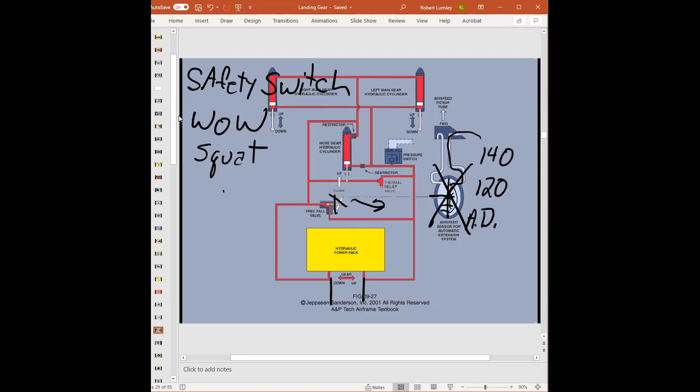Anyways, that's the safety switch. Next, we have landing gear safety pins. I don't have a picture of one, but in your textbook on top of page 917 we will look at that also. It's a mechanical pin that locks the landing gear in the down and locked position. It's generally used when the aircraft's on the ground being serviced. We lock that out because we don't want anybody to retract the gear when the aircraft's on the ground or somebody's working in that area.